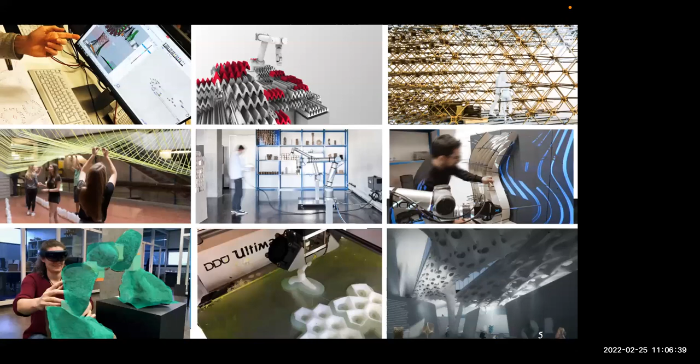So as I said, I'm an architect from the Technical University of Darmstadt, where I was basically doing research and running courses for architectural students on how digital technologies like programming, robotics, additive manufacturing, like 3D printing, influence the design process of architects. As you can see in the center, I was hired basically to set up a robot lab, as I had former experience at the Technical University of Braunschweig, where I used some of these collaborative robots.

And as you can see here, that's in the very beginning when they were very cleanly put into the lab space over there. But usually how it looked over there was this. So we are very intrinsic in these processes of materialization. So how do you bring things from the computer screen, things you design, into the physical world, basically? And we do that by using computational processes in the computer, but also digital fabrication techniques. And today I want to talk with you about some challenges that I see and I hope to address with digital technologies and computational approaches.

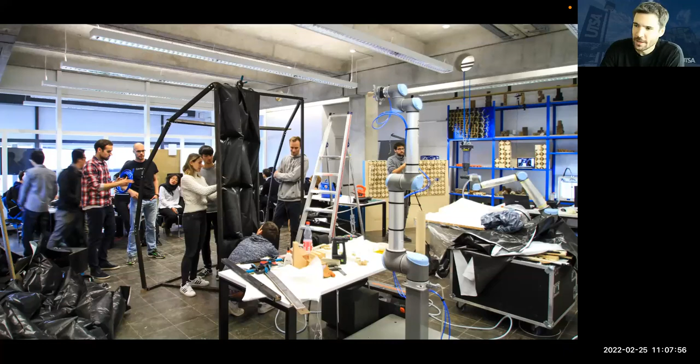So 2020 was the year in which, according to estimates, for the first time, there were more man-made objects on this planet than biomass. You can imagine a complex crust of man-made objects is covering our planet. While nature's building materials are constantly changing their aggregate states, the largest man-made objects are poorly able to do so. This presents us with global challenges to which architects, as those at the very beginning of the value chain in construction industry, can make huge contributions.

A building is usually reduced to a material graveyard at the end of its service life. The valuable building components and materials in buildings are lost at the end of the lifetime. So therefore, the goal must be to design and construct future buildings that can be deconstructed or reconstructed without significant degradation and loss of resources.

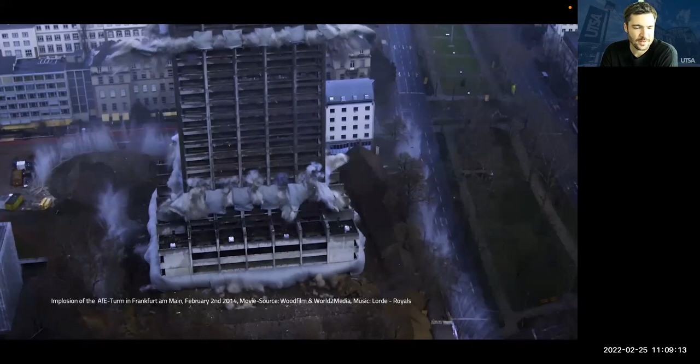As you can see here, one of the Frankfurt high-rises was demolished in 2014. And you can see that all the material components, all the energy that went into this building is basically degraded into dust. And although this is a spectacle many watch, it's devastating to our planet because a lot of energy went into the production of the concrete used for this building. Only to build a couple of years later a very similar building with a very similar concrete structure at the very same place. And you can see that there are a lot of issues when it comes to material consumption, but also energy consumption and labor efforts that go into these.

At the same time, in architectural production and construction, we face the problem that the design part of construction or of architecture is already highly digitized. We use computer-aided design softwares, computer-aided engineering tools, and it's increasing when it comes to construction, but there's still a huge gap when it comes to digital construction techniques.

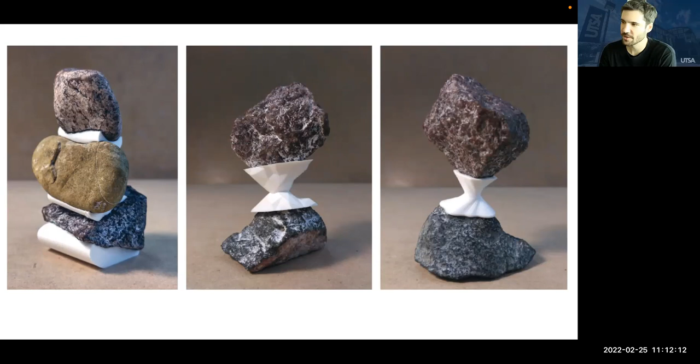And then we started to develop and design processes in which we can build with these 3D scanned stones, basically. So here you see different approaches to connectors between, in this case, basically rubble material. And we did that with additive manufacturing, so 3D printing, in which basically the resolution of this fabrication technique fits very well to the highly accurate meshes that we generated in the 3D scanning process. As you can see here on this image, it's almost a one-to-one translation from the digital data that was based on the physical stone into a connector in this case.

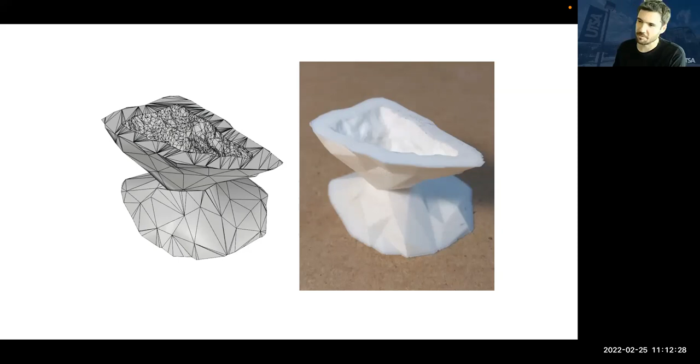We did a couple of experiments and I'm currently still trying to scale these processes. So we looked into scanning several stones and building more meaningful architectural figures, basically. As you can see here, the idea was to build a very basic arch in this case, in which it would be very important how these stones, the 3D scanned stones, would align to each other and orient to each other. Because you can imagine once they are, the interface between these stones becomes suboptimal according to the force translation between the stones. You want to avoid that.

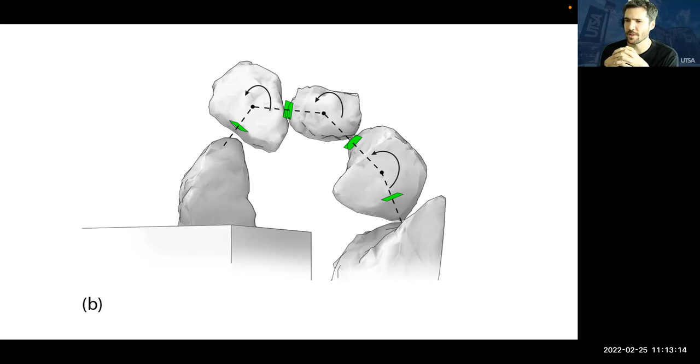And that's where machine learning comes into play. We implemented a small algorithm, and that's a very initial stage of that, where a genetic algorithm basically starts to search for the optimal orientation of these stones. And we basically optimize here towards an almost orthogonal orientation of the faces of the stones on this arch curve, which is basically the thrust line for this arch. And you can imagine, obviously, you could do that manually, but it will take a lot of time and makes it very difficult to find the optimal solution.

And then once that has been done, you can see again here, the dashed line is the thrust line. So that would be a line that only translates into compression. So there's no tension needed in this kind of arch. And then you see this thrust line was basically calculated on the weights of the stones. And then we place these very simple or basic cubes along the thrust line as, again, connectors to build this thing. These were then 3D printed again, highly detailed elements, although the outer shell of these boxes is relatively simple, but you can see there's a lot of detail.

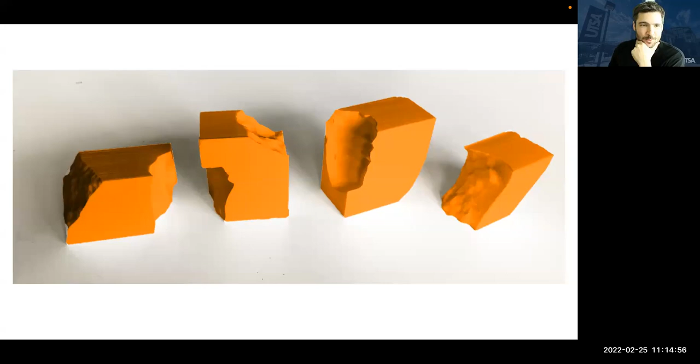And then there's the big question, how do you assemble that? And having never done something like that, we were quite optimistic that this will be relatively easy, but it turned out quite fast that it's more challenging than we expected, because the orientation is very important and you have to find the right orientation while keeping the stones in place. And we figured out that it might be helpful to have a 3D augmentation of this assembly process.

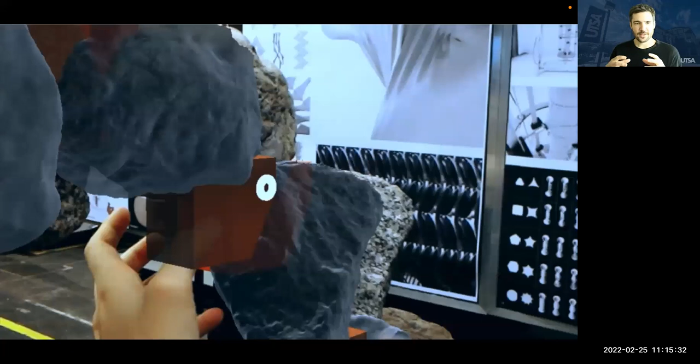So we basically used an augmented reality headset here, Microsoft HoloLens, and augmented the assembly process with the exact orientation of the stones that we wanted to assemble. And here in the video, you see there's a lot of tolerances when it comes to the stones shifting. It was a bit better on the actual object. This is a little bit caused by the capturing process.

And still, it was very helpful, because when you do that, you don't have to go back to a paper plan all the time, which is the usual process on construction sites at the moment. Instead, you would have a 3D model in front of your eyes that would allow you to understand which stone has to go in which orientation. And that drastically sped up the construction process or the assembly process of this little arch.

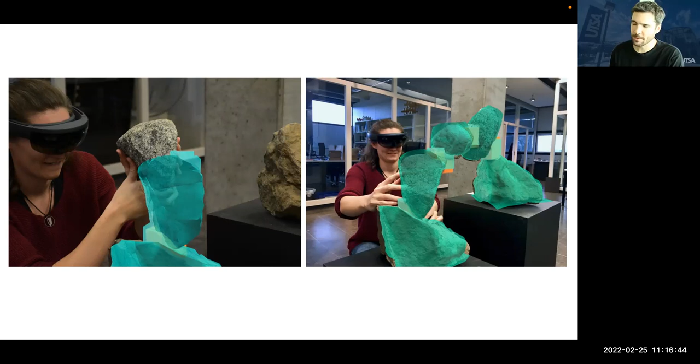And again, it's a small demonstrator, but so far it got a lot of attention, and people are quite excited about these ideas, because it shows a fully or almost fully digital design to assembly process based on a very analog or very unstructured material, in this case, the rubble material. And the detailing can become quite impressive in these objects.

Nevertheless, a great achievement of that project is that it could be an answer to use demolition waste. So the current process for taking down buildings is basically to demolish it. It's not deconstructed or anything.

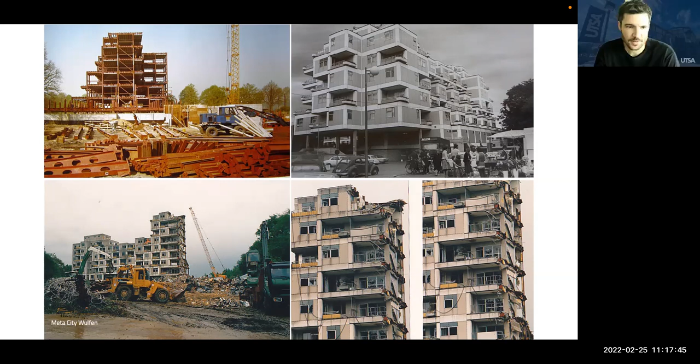But at the same time, we started to challenge also the way we demolish or take down buildings. So we started to wonder if it would be possible to deconstruct a building, to cut it down basically in its initial components in such a way that you could already build a new building based on the components that you extract from an existing building. So therefore, you would again need to capture what is already available.

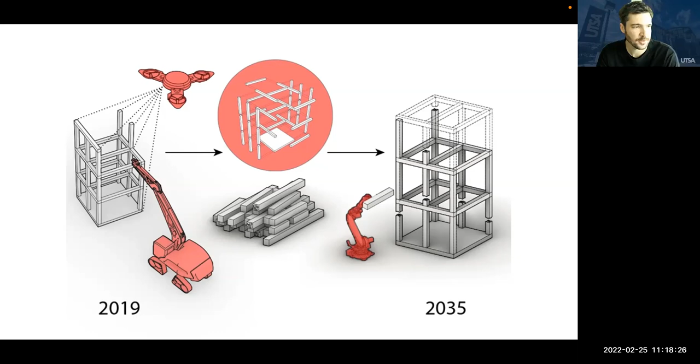Some people might argue that there exists a lot of information about buildings, but most of it, especially for old buildings, would only exist in paper plans. And even those plans are not accurate to the real as-built state of these buildings. So we went ahead and took our architectural building. You see the architectural building from the University of Darmstadt, where I conducted my PhD. And we basically used that as a case study for this approach.

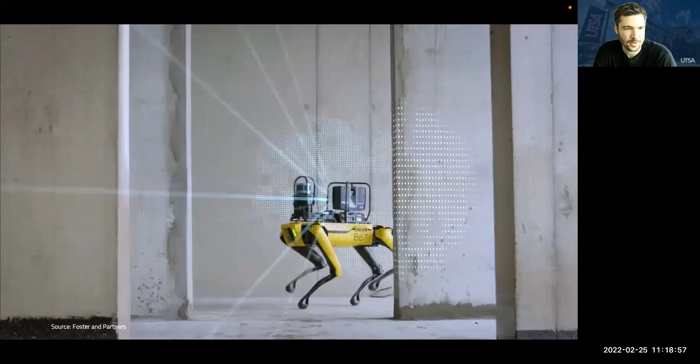And you can see here, this is a video from Foster and Partners, one of the world's biggest architectural firms, who are quite excited about this Spot Mini robot to capture basically the as-built status of their construction processes. They do that to monitor the actual building process, but we were more interested in using similar approaches to see how we could deconstruct a building. We didn't have a Spot Mini, but we envisioned we would have one. So we still went and 3D scanned our whole building.

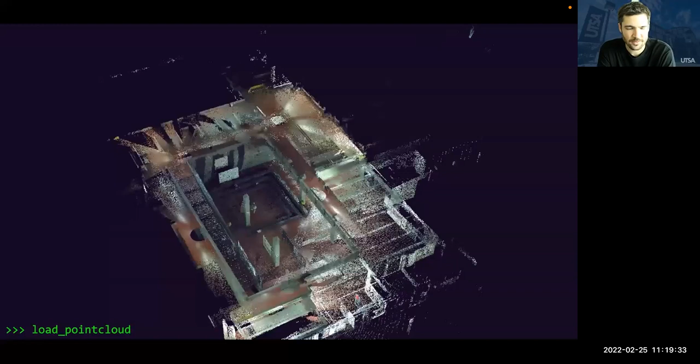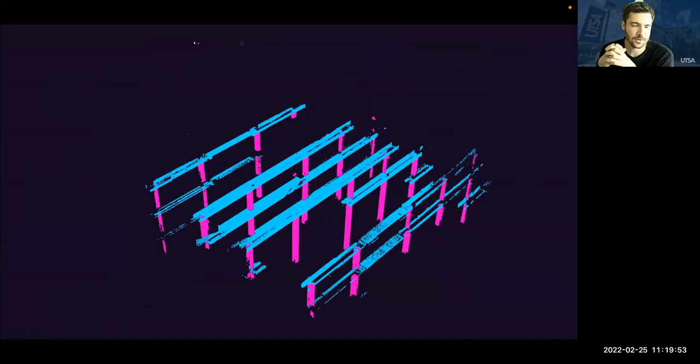So here you see a point cloud, a very dense point cloud of almost the entire building that was captured with stationary laser scanners. And then we started to analyze this building and see what kind of building elements are really there that we would like to use for a future building. So you can see we extracted from the overall building the columns and beams, which are already prefabricated concrete components.

Additionally, we did an exterior scan using drone photogrammetry to capture also the exterior of this building, to then, based on this very accurate data, rebuild basically a digital model of the entire building, which we then again dispatched into the elements that would be available. So we focused here only on the concrete elements: slabs, facade elements, beams, and columns. And this would then become our building stock for a future building.

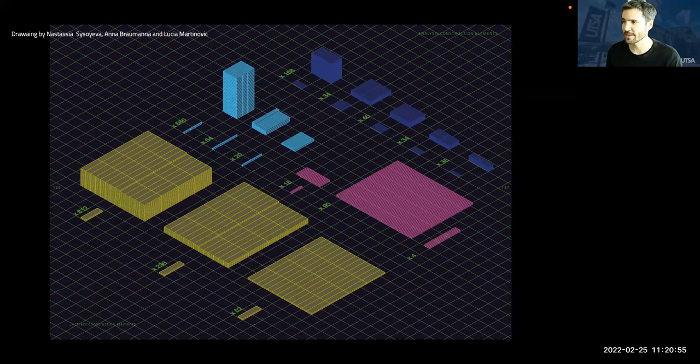So you can imagine, if it was a Lego set, this would be the Lego set for a new building from a building that is still standing. We then worked a little bit on basically a building catalog. And then the big challenge was, how do you actually extract these elements? It's concrete, it's not as easy as taking Lego buildings apart.

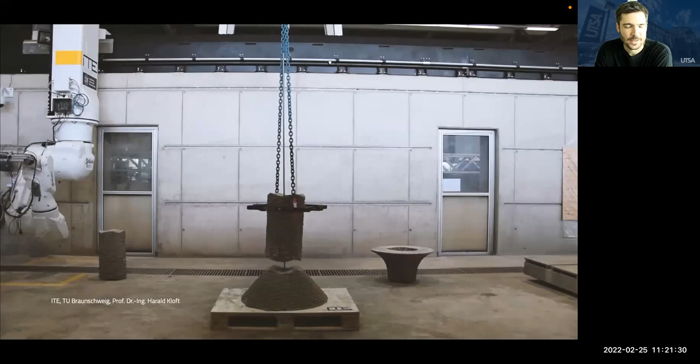And my former university, the Technical University of Braunschweig, has a large facility that focuses on additive manufacturing. So you see a 3D printed column, but they also have machinery that allows you to cut very accurately into concrete elements. And based on this cutting, you can develop dry joint construction principles.

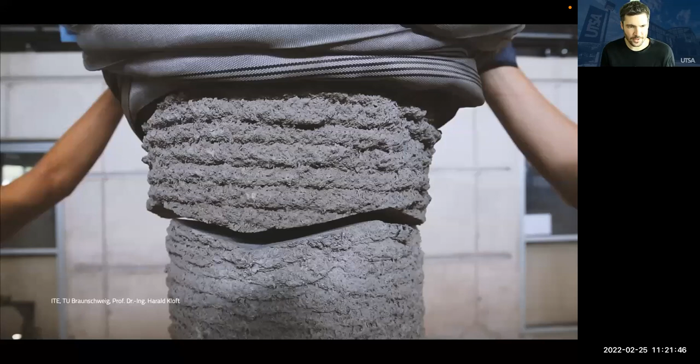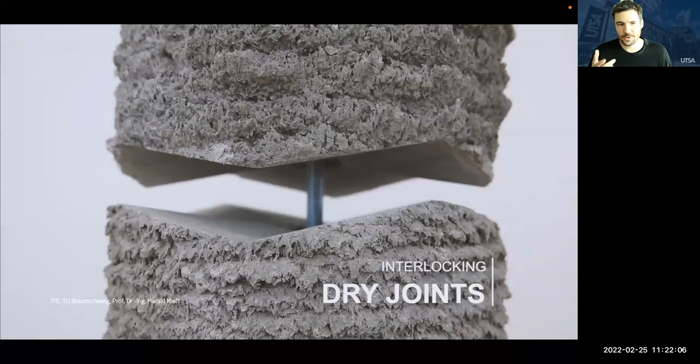So you can imagine they have a concrete part that is not very accurate in its connection details. And in order to make the more accurate connection details, they cut into the column. And what is so beautiful about this process is that it not only helps us to deconstruct or cut the building into parts, but we could do that already with a new joining idea in mind. As you can see here, a dry joint that would automatically shift the different parts into the right position.

And then again, as I said, I try to connect research and teaching as much as possible. So we started to look into these kinds of ideas with our students. And one challenge that we found with the idea of deconstructing buildings might be the storage of building components between the actual deconstruction process and the construction of a new building. And here our students basically came up with the idea to store the building elements that were extracted from the previous building in a bus station.

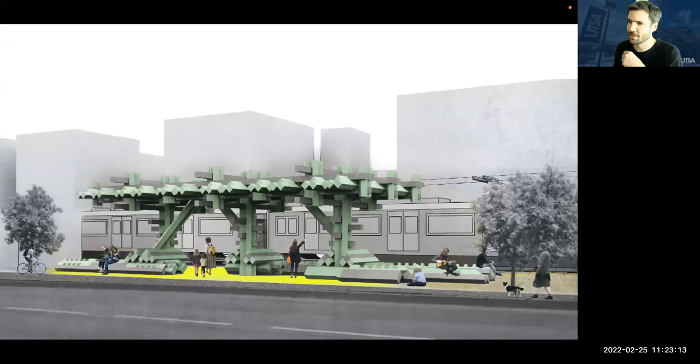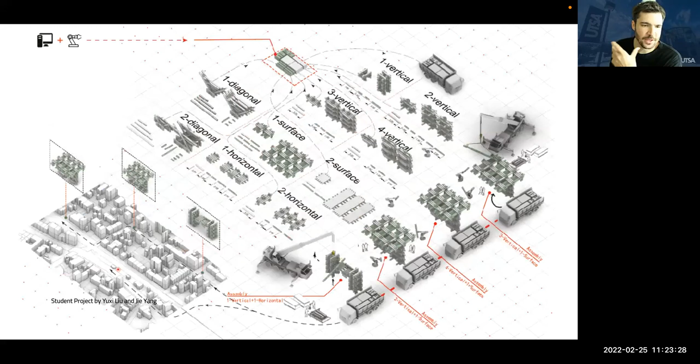So they would build a bus station, which anyway has fairly good access to the transportation network, and then the building components could be stored over there. And they started to develop further ideas about how we could actually develop connection details that would allow us to assemble parts back from these components. And here you can see a lot of iterations, thinking about the process, how it could be extracted from the site and could be delivered basically to new sites from the bus stop.

All this in a very diagrammatic approach, but always keeping in mind that for these elements of the future building, we wouldn't want to make a solid building, but instead rely on interlocking principles, dry joining principles, which you see here, in this case inspired from Japanese wood joining, which you can, with a little bit of effort, transfer also into concrete assembly methods.

During this deconstruction process, you would obviously have to consider various processes to assess the quality of the concrete parts, maybe repair concrete parts, which this project here was investigating, almost like a hospital for concrete parts before they go out into new construction projects. And then, basically design tasks. So in this case here, a bridging structure.

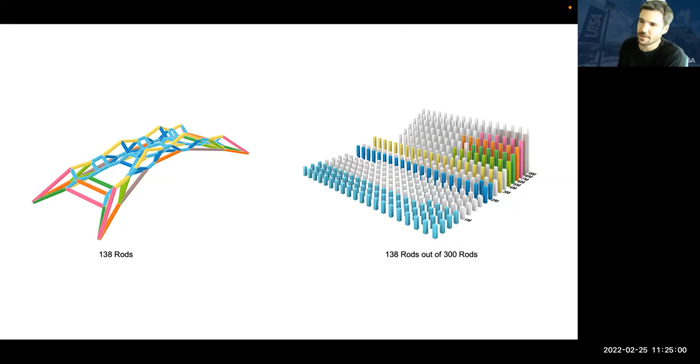And again, the question would have been, how can we extract the right parts from the existing buildings in order to build this bridge, or even to make use of all the components that could be available to build even several structures from a building that is not needed anymore. And with our students, we looked into, again, dry joining methods, which would allow us to avoid complicated joining details that would make it hard for future generations to take these buildings apart.

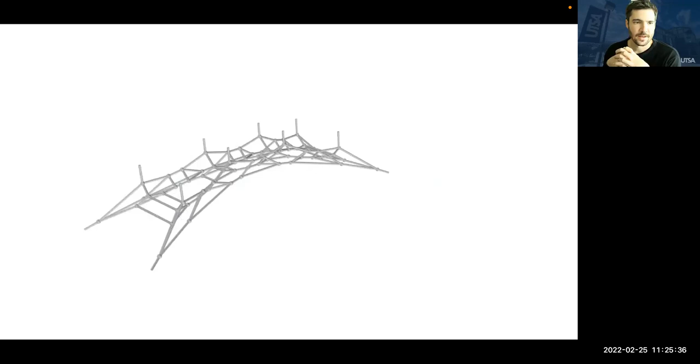So we developed a computational process that would allow us to design, again, a bridging structure purely on compression forces. So we could simplify the connection details. And in this case, it would almost stand without any connection details. So the little black details that you saw here, these are mainly to avoid buckling or sliding of the structural members of the bridge. They are not really translating too much force, because the entire structure is, as I said, compression only.

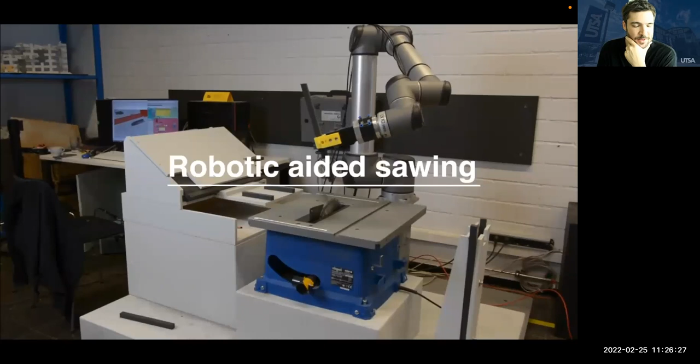And then we started again to look, more as a sketch or a small scale demonstration, at how to do that robotically, as we didn't have access all the time to these big tables, to this big saw that you saw in Braunschweig. But we basically sketched the process and cut here wooden parts again, which would reflect the dimensions of the concrete parts. And then you can see one attempt to assemble these parts. And then finally, all the cut elements, again, on a model scale. That's a typical method of architects, to use small scale models to build these things.

And then the final assembled thing, which again is completely assembled without glues. Only the shoes that sit on the plate to basically ground the whole structure are fixed using screws. Everything else is just purely dry joint. Again, almost like a complex Lego system.

And this project allowed us to basically reconsider the idea of deconstruction of buildings, which currently is only done in order to save components from becoming waste, and they might have been stored somewhere else. But this project really pushed the idea to do deconstruction already with the construction of a new building in mind.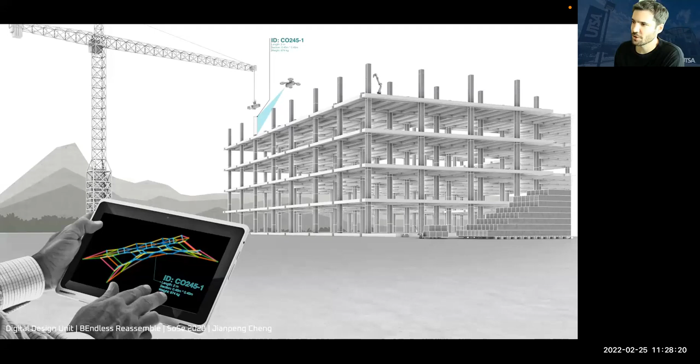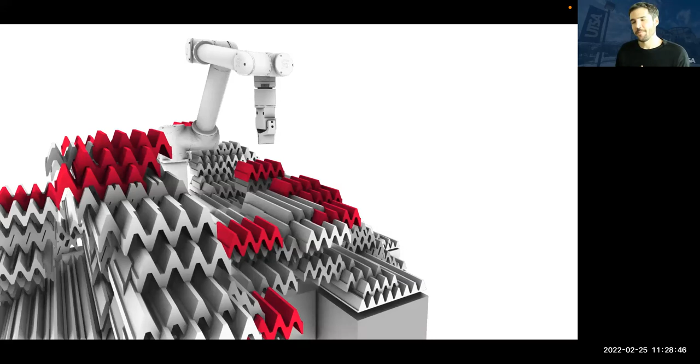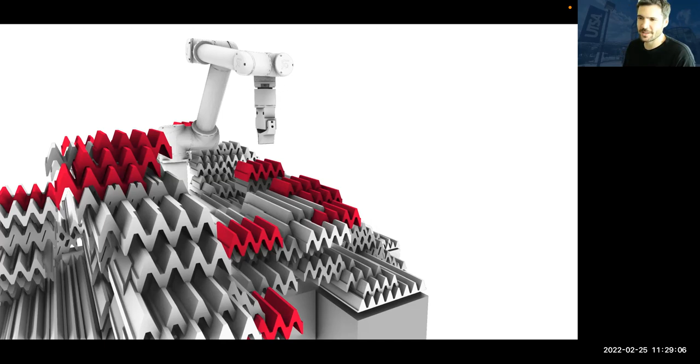So we looked into robotic assembly methods, and you can see here these are becoming relatively complex Lego bricks in this case, that were designed for the robot to be placed, but also to be disassembled fairly easily. So you see these zigzag shaped elements that have a little bit the purpose of negotiating the robotic capabilities, because at the very beginning of this project, our robot didn't have any sensing skills, and that can cause some problems in construction, because not everything is as precise or as ideal as you wish.

So we basically sketched a project, again, a small demonstration of the idea of how we could use these building elements in order to make buildings almost like editable throughout their lifetime. And you see here, it's a small scale installation. The robot would constantly pick these zigzag shaped, in this case, foam blocks, and constantly replace them in an art installation that would further change the meaning of this installation.

So you see these bright sprinkles on the installation. There were some hidden messages on the installation that would be reassembled, changing the meaning of the whole structure. You can see here, I don't know if you noticed, there was the word act that would be changed into the word react once the robot replaces these elements. And that's again a placeholder for the idea that the function of this building can change, the usability, the program of the overall building.

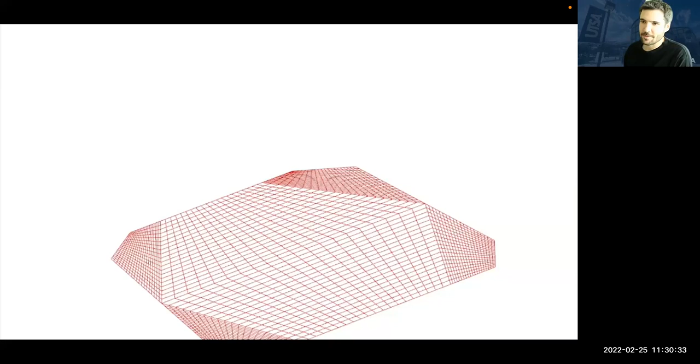And basically to show that if we wanted to achieve that, there were ways how we could design future buildings to be basically editable. Again, this is highly involved with developing computational processes for the design of these structures. So you can see here we had a volumetric shell structure that then has to be analyzed computationally to find the right combinatorial arrangement of these parts. As you can see, it's different sizes of these zigzag shapes. Some are long in the one direction, then there are shorter elements, and these allow us to build various structures.

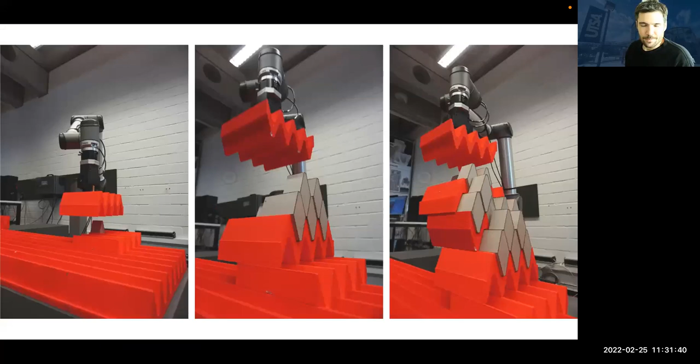You can see here another small scale demonstration to show that even with this, we are able to build cantilevering or arching structures that are then again able to be completely disassembled. And we started to look into creating gradients of material properties. You can imagine all these foam blocks, they have the same weight. And what you see here, we started to add these gray blocks, which are heavier than the red blocks, which would allow us to build even more cantilevering structures, which is something quite important in architectural construction.

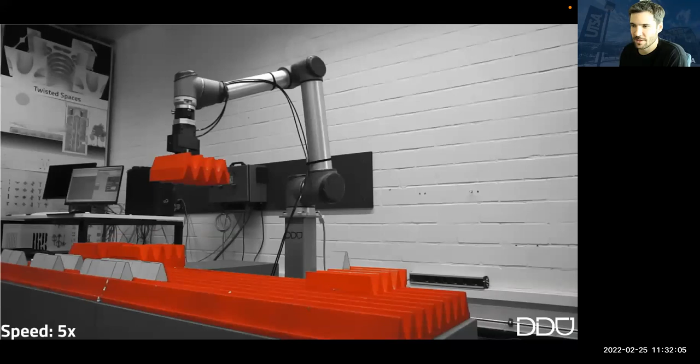You can see here again the robotic assembly process. And again, this doesn't have any sensing skills here. This robot just executes a plan that is pre-computed for it. But this would be a way to showcase that we could even build bridges. But it also shows how delicate the calculation was in this case. So we really pushed it to the maximum. So once you remove or add weight at the wrong place, it would completely collapse.

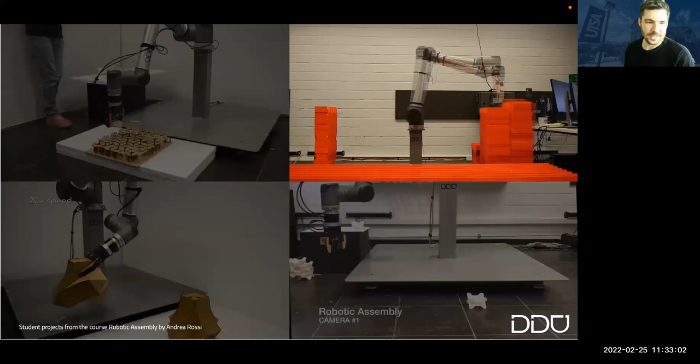Which raises also some of the questions. How much do we actually trust our computational processes in cases like that, where the combinatorial space of these elements can become very big? We also started to look into different modules, different geometries of these parts.

Here also some experiments that a colleague of mine, Andrea Rossi, at this time at the Technical University of Darmstadt, was doing, that again deal with other geometries that would also allow us to build cantilevering structures, but always designed with the purpose to be assembled by a robot, to automate the robotic assembly process. Because if we want to become more granular in our built environment, while keeping the editability of these parts, it makes sense to think about automating these things instead of asking humans to do the labor.

Again, all these projects were usually done with architecture students. Here and there were some computer scientists involved that helped us set up certain things. But it's also always a great opportunity to allow architects to interface with these high technological tools like robotics, which we do not see on too many construction sites yet. But we have to train architects in these things to bring them to the construction site.

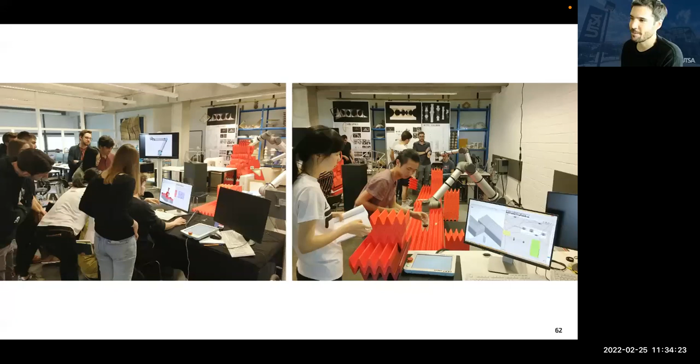Yet there are a lot of challenges in building with robotics. I mentioned that these don't have any sensing skills, so they would just execute our plans. And you see here, they drop parts, they don't even notice until a human would interfere with these. They don't see their errors basically, unless you implement something to do that. And at the same time, even if they would sense that they did something that was not intended, they wouldn't know how to adjust to it.

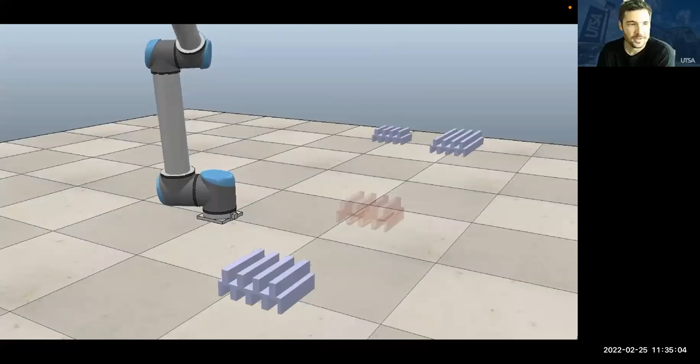So if we want to go to real construction sites, we would have to adapt these things. And that's where we started to reach out to the computer science department, basically the autonomous systems labs at the Technical University of Darmstadt, which use reinforcement learning to attempt these kinds of problems, to allow machines to adapt to certain problems. As you can see here, the robot would understand that it caused an error and would learn how to adapt its path in order to do that.

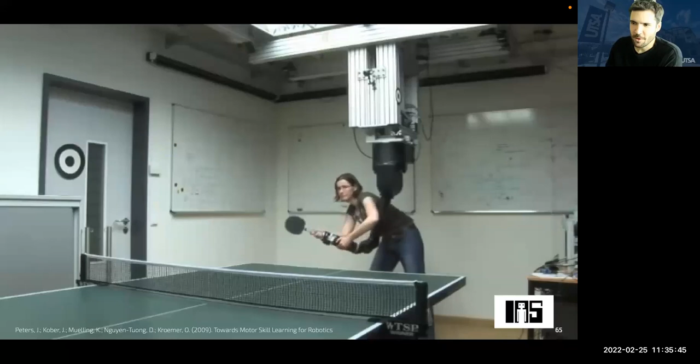Before we reached out to them, they did a lot of great experiments. Like here you can see learning by demonstration, in which a PhD student is basically training this robot arm to play table tennis. So the student is showing the robot some basic strokes to return the ball that is captured by a camera system. And then again, there are many hours going into the training process and programming of these things.

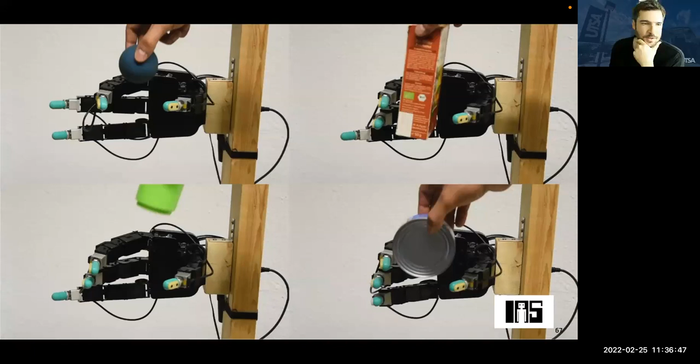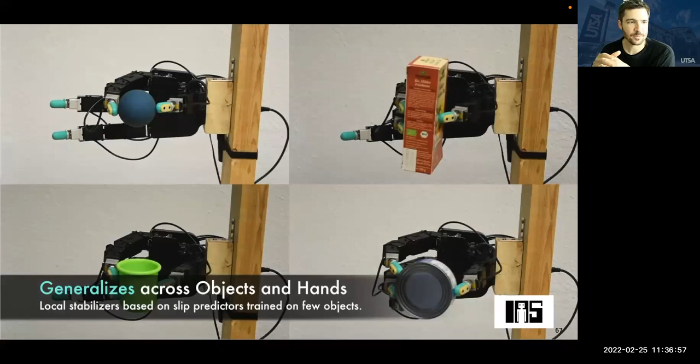But after not a few, but many training sessions, this robot learned a policy that would actually allow it to beat a PhD student of computer science in a game of table tennis. And we reached out to them not only because of their skills in training and teaching robots to use machine intelligence, but also because they do research in tactile sensing for robots. As you can see here, the robot would adapt its grasp based on the object that you hand over without destroying objects.

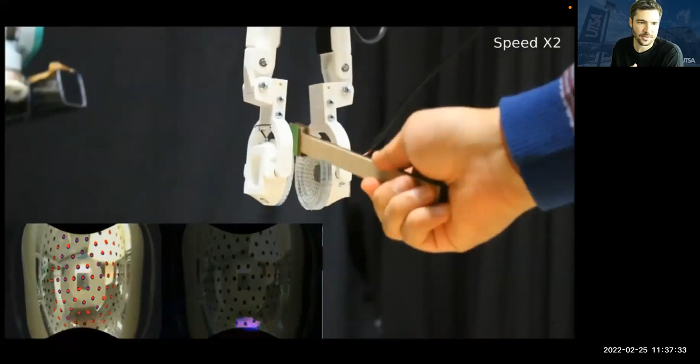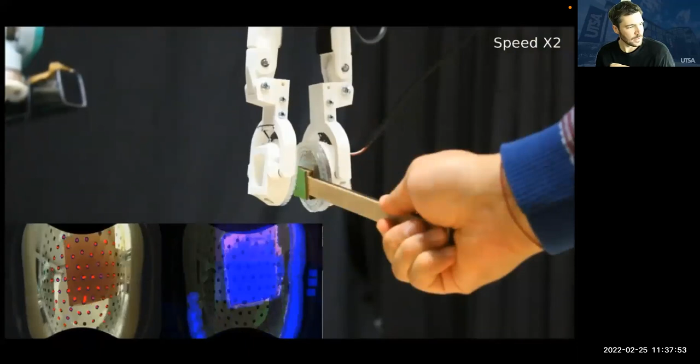And while these sensors here that you see on the fingertips of these robot hands are quite expensive, we started to look into sensors that would be more affordable and would also enable us to have higher dimensional features, basically. As you can see here, this is a vision-based tactile sensor. So it's basically a camera that has a soft film in front of it with these black dots embedded in this silicone skin. And these blobs can be detected by a blob detection algorithm, and then we were able to calculate the force that is being applied once something is grasped.

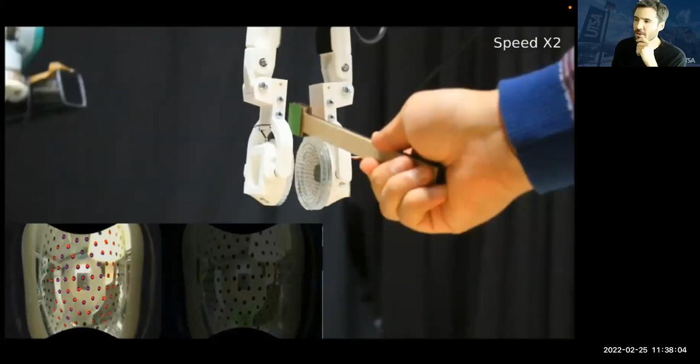And here you see how the sensor is basically built. It's a $20 camera, a few 3D printed parts, and this silicon film, which is actually the hardest part to fabricate to keep it transparent. But it allows for several modalities. As I said, you can still see elements through it. Here you see this orange element because it's a transparent sensor. It would allow us to detect forces, but also rotation of elements.

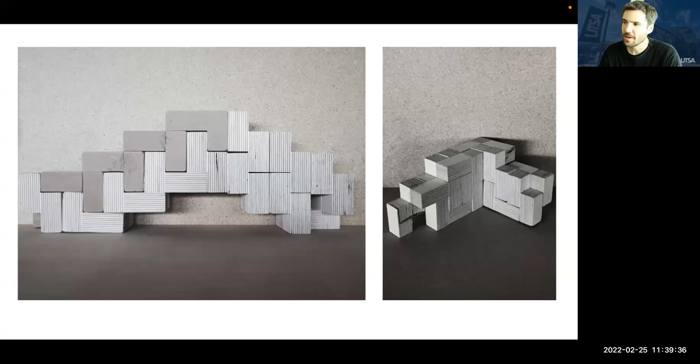Obviously, this would again allow us to reconsider what kind of elements we start to assemble, and we started looking into these blocks here, which at first look might just look like very simple blocks being placed on top of each other, but these are actually SL blocks. This is a relatively complex Lego block again that allows for interlocking mechanisms, and it's based on research by Shih, a mathematician involved in architectural design projects. So you can basically imagine it's an L block and an S block that are fixed to each other in this kind of configuration.

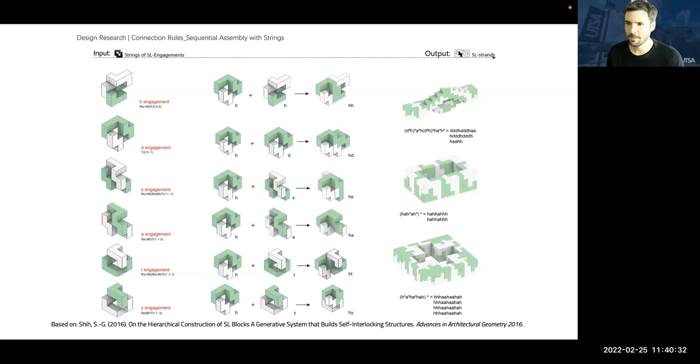And then with this configuration, you are able to find engagements that would always allow these parts to really immobilize each other. So these elements don't move anymore once there are 4 or more parts being placed. So we don't need any glue, but still we can build cantilevering structures, and these would only be sequentially assembled.

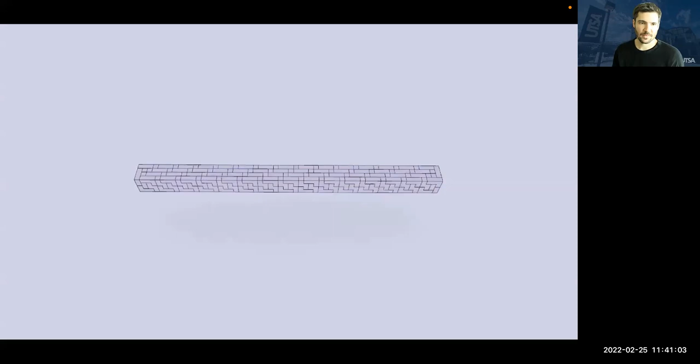And here you can see such an assembly process. So you see they can become relatively complex. And again, the beauty of these processes is you would only be able to remove these blocks in one direction, which allows for more complex assemblies. Here, for instance, in column, it is nice.

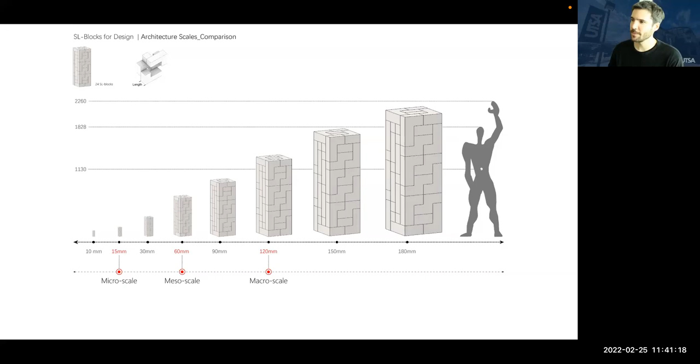These blocks can be scaled from very small, like 1 centimeter scale, up to very big scales, and basically the bounding box of these elements can be articulated differently in different materials. So it could be wooden elements, concrete elements, or more articulated elements that are 3D printed.

Yeah, here's another one. But for me, the beauty in these blocks is really the possibility to assemble and disassemble them without harming the elements. So you wouldn't need to screw, to drill, use any adhesives like glue, and still would be able, without demolishing anything, to take these things apart.

What is more challenging when you consider these kind of blocks is how do you actually find their arrangement, their assembly, and how do you find arrangements in aggregations of these blocks that are relatively big. We developed an algorithm that would help us doing that, where we basically inscribe the different engagements with these letters.

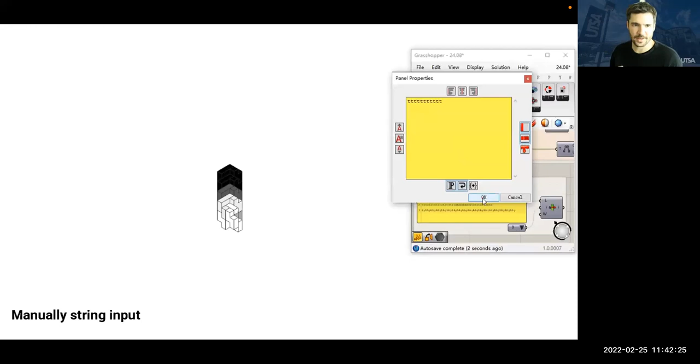So you see here we type strings that are then translated into these different geometrical transformations. And you can play a little bit with these, but it would always be an architect having to figure out these kind of different string combinations, basically.

So we started to implement a reinforcement learning algorithm with its objective function, so basically reward function, in which the agent would always try to keep the blocks as close as possible to the curve, while trying to avoid collisions of blocks that would prevent the curve from further growing.

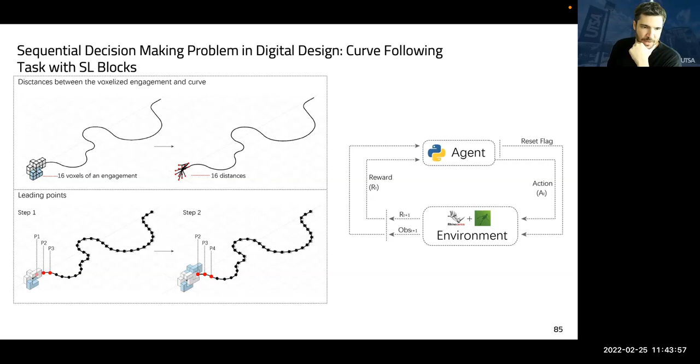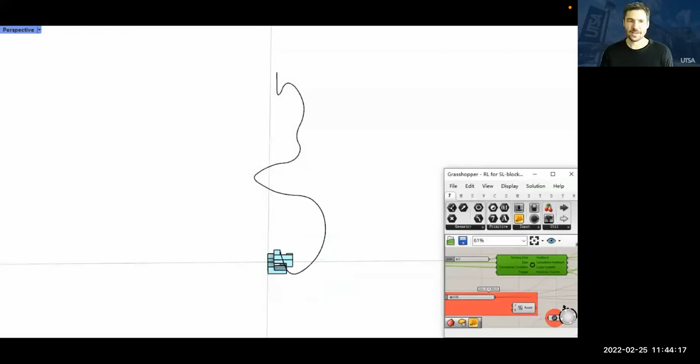And then, based on this reward function, we were able to implement this algorithm, which, for me as an architect, is very beautiful, because it looks to me like these blocks are now finding their position. I don't have to assign where they have to go, but rather the blocks' intrinsic values find their positions.

We started to test different algorithms. So again, we tried to see if we can use evolutionary algorithms, which didn't perform very well. We tested reinforcement learning algorithms, but also a greedy algorithm that is hard-coded and would really just perform this one task.

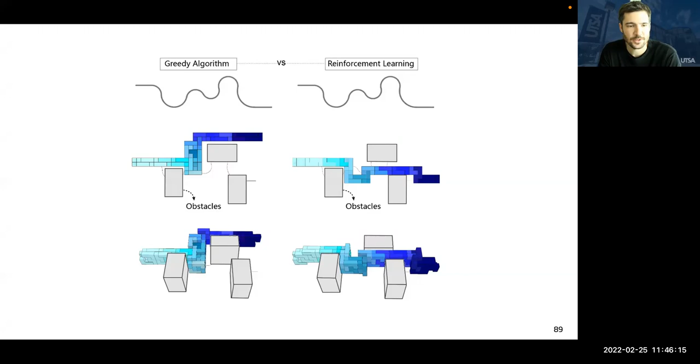As you can see on the top, on the left side, the greedy algorithm starts to go around the obstacles from basically outside, whereas the reinforcement learning algorithm, because it also has a longer horizon of where it wants to end and wants to go, achieved way better results in that.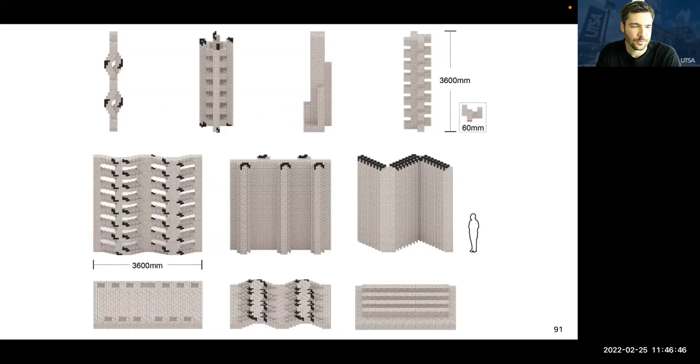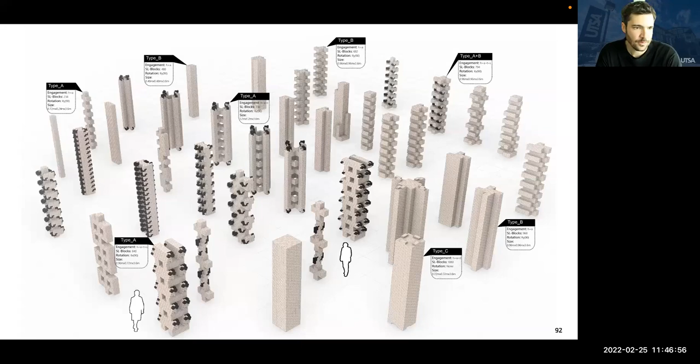If I take out this block-like nail, only then I can start to remove the other members of these blocks. Here you can see columns with the same approach. Again, walls, slabs. All of these can be made from these reversible building blocks.

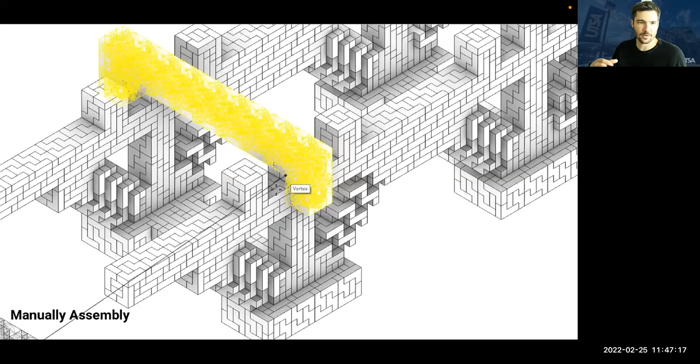And then obviously you can also start to create combinations of different elements. So you can have more foundation elements, and then members that would have more bridging properties, and you can really start to explore very complex arrangements and combinatorics of these elements.

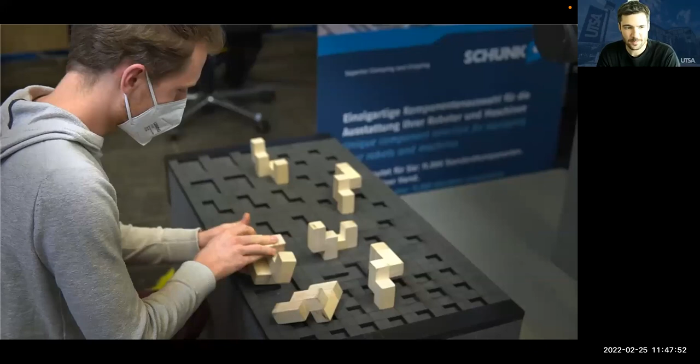And again, then the big challenge would be, how do you actually assemble these things? You see a human, and I can tell you, even for a human it's not too much fun. Especially if I give you a very precise plan of what I want to achieve, the combinatorial aspect of figuring out this is the orientation, I have to put it here. That's actually, beside being a tactile task, very complex already.

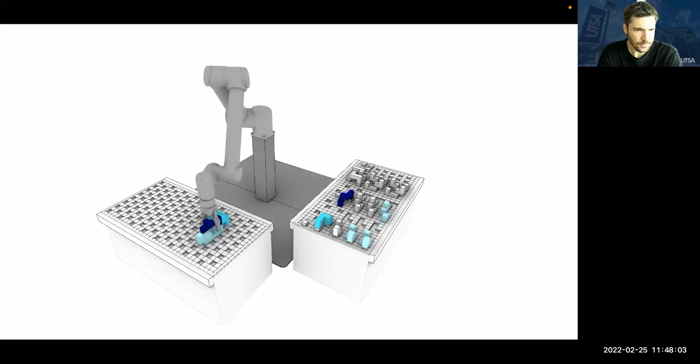So we started looking into how we can actually automate these with our robot, while also making use of the tactile sense, because these elements have to slide in very precisely. So there's not a lot of room for tolerances, or as soon as the robot grabs the part a little bit suboptimally, or the part has some tolerances, it would basically collide without any sensing.

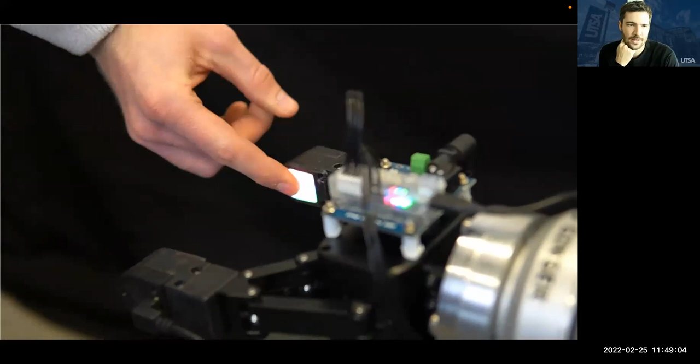So we started to improve this sensor that you saw earlier. This one is called GelSight, which is based on research from MIT, and a big company is also working behind that, which I'm not allowed to share yet. Anyway, so this is again a gel, and behind it there's a camera, and you can see here the camera image. So we don't have dots anymore, but instead we have these different light diodes in there that allow us to understand the three-dimensional deformation of this gel.

And it almost has like a fingerprint, which serves here as the dots from the previous sensor. Again, this sensor, material-wise, you can build for $50. You just need the PCB board and the materials. Assembly and fabrication of that is a little bit more expensive because it's labor-intensive, because a lot of things are not mass fabricated yet, but they are affordable.

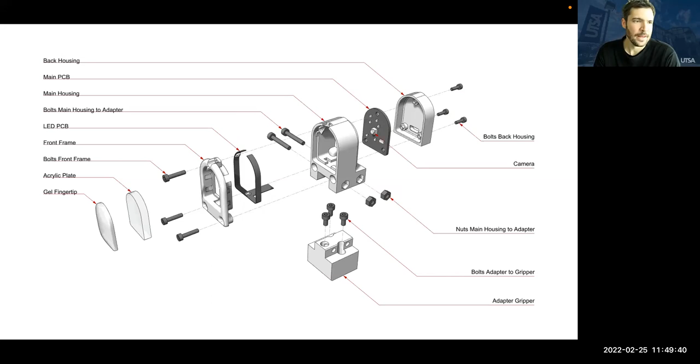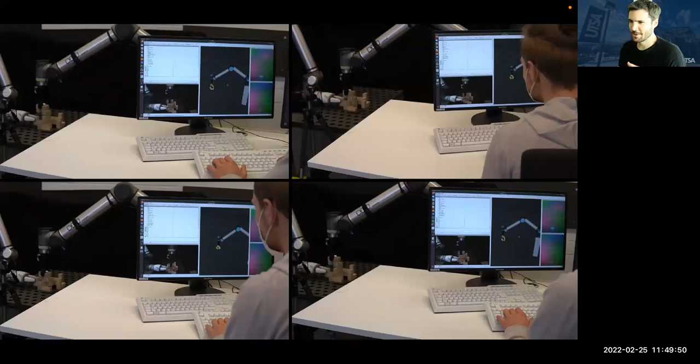And then we started looking into how we could train a robot to assemble these things. Here you see we did that by demonstration again. We didn't do that by guiding the robot, but instead by playing Tetris on the keyboard to assemble these, and then recorded the signals both from the tactile finger sensor and the position of the elements, as you can see here with these ArUco markers. And then finally we were able to do very simple basic assemblies.

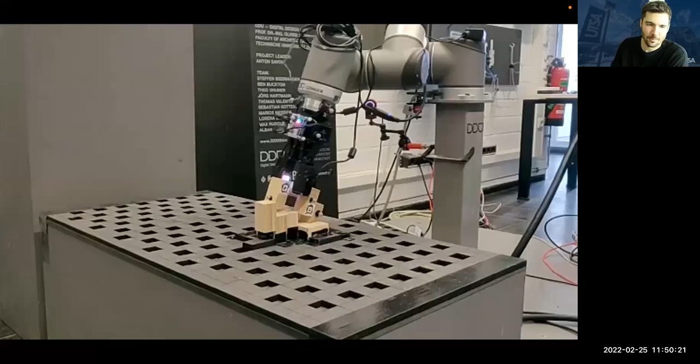And then we kept on training the robot based on curriculum learning, which is basically you tell the robot where it has to go, this path would work, and then you start adding little errors, little deviations from the optimal path, so it would constantly adapt. Unfortunately, during my PhD, we didn't manage to build a bigger structure. This would be one of the goals. The research project is still going; they even got funding, I think a quarter million, to investigate this.

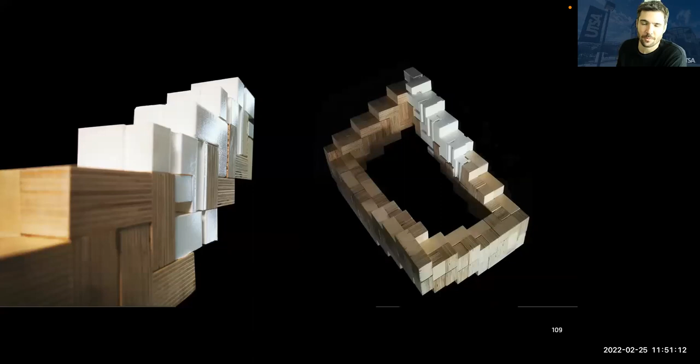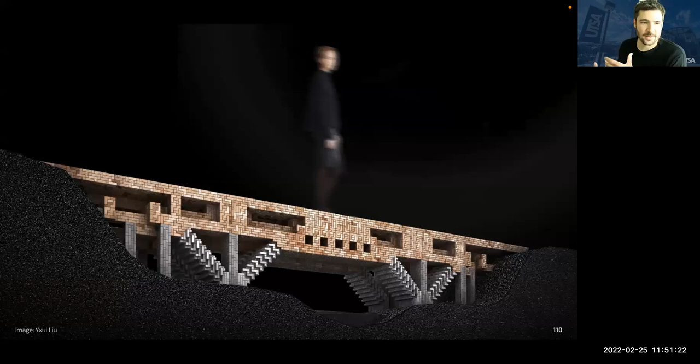Again, it's basic research. It's looking into how we have to design building elements, building components, both with robot skills in mind, but also with this idea of taking these parts apart. So my biggest vision for these kinds of elements, and I'm not saying that the SL blocks are the final solution to change our construction industry, but for me they are a placeholder for this vision of a buildable built environment that we can edit, that's easy to take apart again, and that we can maybe in the future even change while we are inhabiting these buildings, without creating dust, noise, and all other harms on humans and on our environment.

Again, as I mentioned, it was a collaboration. Back then I was still part of the digital design unit at the Technical University of Darmstadt, which is the architecture department, and the Intelligent Autonomous Systems group led by Dr. Jan Peters.

And so to conclude, I hope I was able to show you some projects that dealt with the manipulation of our built environment. This could start from demolition waste or from the idea of using deconstruction methods that inform how we can build in the future, but also combinatorial ways that we can use for our future buildings that would be aligned with automation in construction, mainly through robotics.

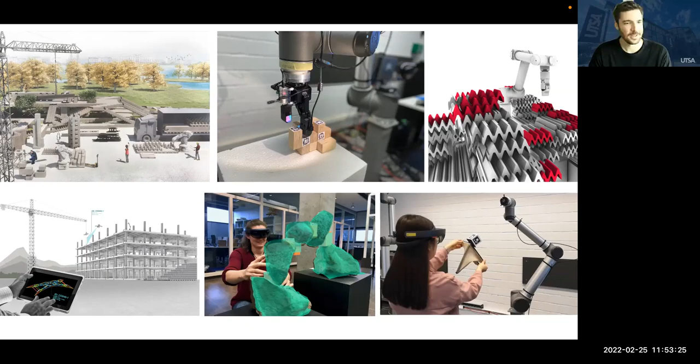Great presentation, Bastian. Very different from what we are typically used to. Great visuals and very interesting applications of both the robotic space as well as some of the algorithms, the reinforcement learning algorithms. Thank you. Questions, folks? You can either ask or post a question in the chat window.

I do have one question. Hello, hi. That was a great talk, Dr. Wibranek. I did have one regarding when you're using the demolished debris to create things like arches. Your simulation created this photo-scanned version of the mesh, but that would use the geometric center of gravity, whereas the center of gravity of these blocks would depend on the heterogeneous nature of the debris, and debris can consist of cement and rebar and other things. How do you account for that change in geometric center when you're simulating the balance?

Yeah, good question, good point. No one ever raised that question so far when it comes to the center of mass for these blocks. You're right. For the simulation of this arch, we basically assumed that it's a homogeneous material, that it would not have any hollow parts or rebar that might change the center of mass. I'm wondering if there would be geometrical ways or measurement ways to figure out where the actual center of mass of things are.

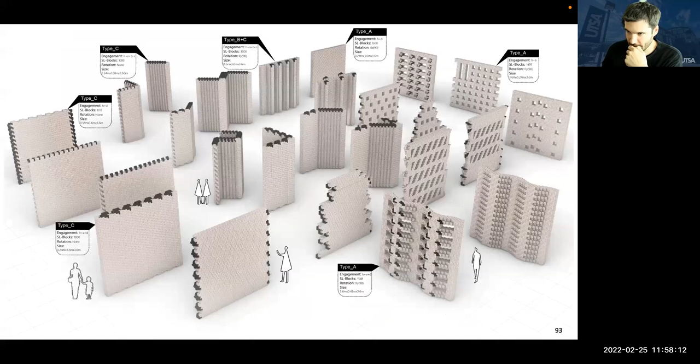You've shown some results on the DQN and RL and the greedy algorithms. Can you go to that slide, Bastian? It was really interesting to see that a hand-coded greedy algorithm performed better. Hard-coded, right? Yeah. Let's see.

Right. Yeah, I think you have a wide range of curves in here. It would be good to see what would be the optimal space for RL, what structures work well in the RL scenario. I think that's interesting. And the other question I had was, do you have the test beds here set up yet? The robotic test beds or any of that? In my lab? No, not yet.